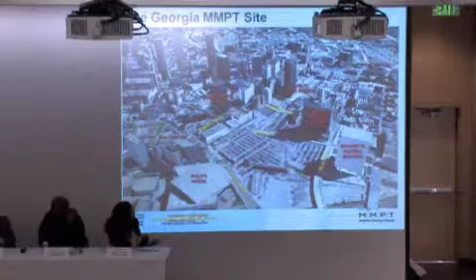This is the study site for the Georgia MMPT. The study area is about 118 acres. It sits in the area commonly called the Gulch, a void in downtown Atlanta currently. You can see it's centered along Philips Arena, the CNN Plaza, MARTA 5 Points Station, and the federal buildings. The MMPT itself will rest on the parking deck between Spring Street and Centennial Olympic Park.

We have several agencies involved with this project. The Federal Transit Administration is our lead agency and is the federal agency funding the project. GDOT is the lead agency administering the project currently. We have several cooperating agencies: the General Services Administration, the Federal Railroad Administration, and EPA. We also have the Federal Highway Administration as a participating agency within the project.

One unique thing about this project is that it's on the presidential dashboard, the We Can't Wait initiative. That means it was selected and is considered one of the nationally and regionally significant projects. This expedites our environmental process and could also provide some funding in the future.

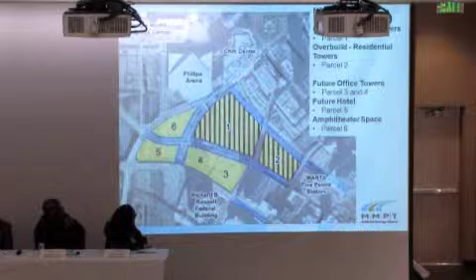Another look at our study area shows the six parcels originally involved in the project. The MMPT itself will sit on parcels 1 and 2, which span between Philips Arena and the MARTA 5 Points stations. The other parcels will be used for development, and those were the primary parcels used in our environmental document and analysis.

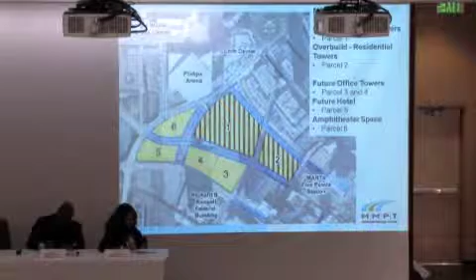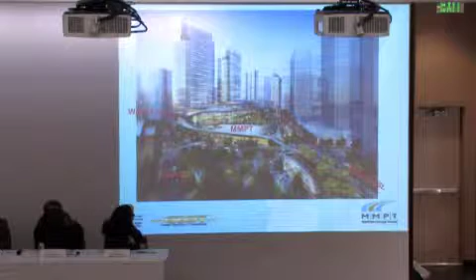Here's an artist's rendition of the MMPT, facing east, looking from Philips Arena. You can see Wall Street and Alabama Street will be reconstructed to be on a viaduct level, bridged all the way over to Centennial Olympic Park, providing greater connectivity from the park over to Spring Street. The Gulch today provides a great disconnect, with little means of getting from one side to the other unless you really know what you're doing. I wouldn't advise trying to cross there.

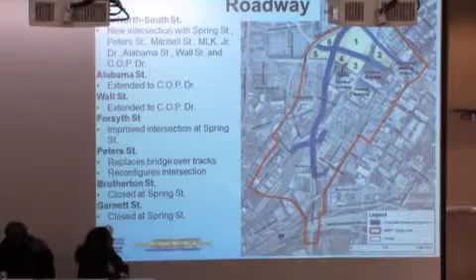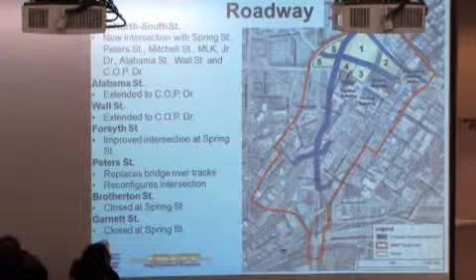As mentioned, with our roadway network, we're bringing Wall Street and Alabama Street up to grade on viaduct level. We're also constructing a new roadway running north and south, which we call New North-South. This roadway network will help create better ingress and egress in and out of the area, and will also allow us to create better blocks, creating better economic potential for development.

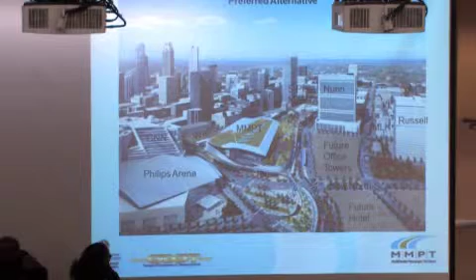This is a shot of an artist's rendition of the Gulch with the MMPT constructed, before any future development. You can see the MMPT itself has a green roof and parking. The park to the lower center of the screen is ADA accessible. You can walk from Philips Arena all the way over to the 5 Points MARTA station and land at underground Atlanta without ever having to physically cross a roadway.

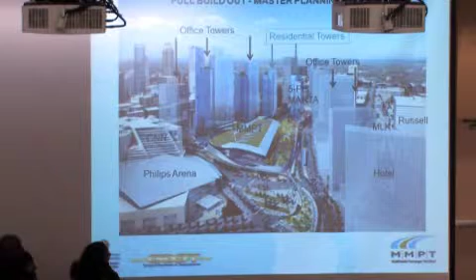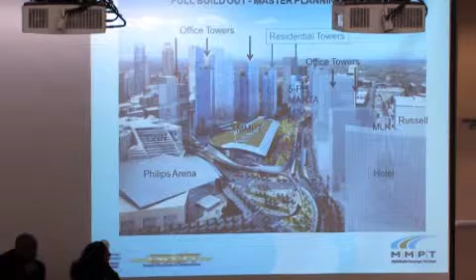With this project also, I guess you can call it the water feature that we build in there. It's a public amenity, but it will help with the flooding problems that currently occur over in Vine City and English Avenue area. We can store and hold the water here and slowly release it downstream, and it will help us with the flooding issue.

And there you can also see the just over 4-acre park that's going to be on the roof of the MMPT, and just on the inside of that, of course, will be restaurants and several other retail shops.

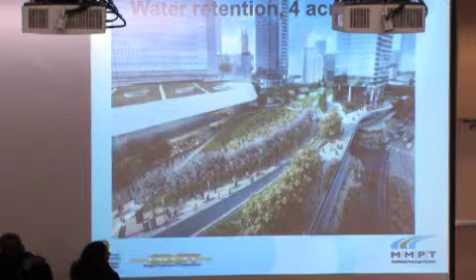Some of the environmental considerations that we have to look into while we're working on the project itself - I think our panelists can do a better job of answering any questions pertaining to these few considerations than I can. So I'm not going to go into any great detail on these, but if you guys have any questions, please ask. So ends my brief overview.

So thank you, Derek. And to kick off our first question, we'll just go down the line here, easy one. What's your involvement in the project, and then why do you feel that the MMPT is important?

Yeah. Hello, my name is Heather Alhadeff. Hello, there we go. Thank you. My name is Heather Alhadeff.

I work for Center Forward, but in my previous life, I've been in the public sector, and so the bulk of my role has actually been leading up to the project that's under, that you just saw being developed, was actually the positioning and advocacy for the project as a whole when I worked for the City of Atlanta as well as Central Atlanta Progress.

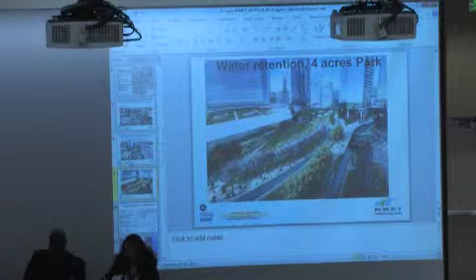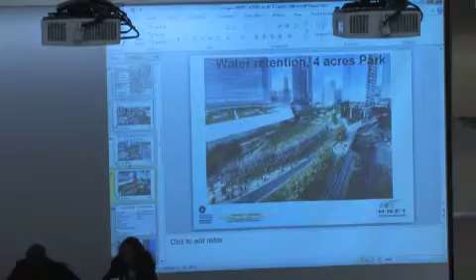That's restaurants, shops that are based on local residents buying things at night too. I think the key message there is it must be beyond tourist-based, special-event-day retail, and that's what a lot of people have continuously brought up, the need to fill that void, and that will help with having purpose and reason to go there. But the urban design, again, making sure that some of those things like glass at the street level, so you can feel like you're being seen and it's safe and comfortable.

Plus, people like to people watch and be where people are. So if they can see the folks and see the activity, that'll help a lot. But I think the key message from a planning perspective is that it has to be not just special event or daytime serving retail.

One of the points that the master developer made when we were selecting this particular design was to have that street life, and also if you've got retail on both sides of the street, it tends to work better. So that was one of the factors in consideration when we sited the MMPT where it is.

One of the things we also begin to look at, both then and now, is the importance of your other major neighbors or big drivers. Case in point, you don't go and hang out at the Georgia World Congress Center unless there's an event there. You don't take a walk through it, you don't say let's go there and do something. You have to be able to transform those things. You see some elements around Centennial Olympic Park, around the stadium, or even on the other side, there are some moments to the west of Northside Drive.